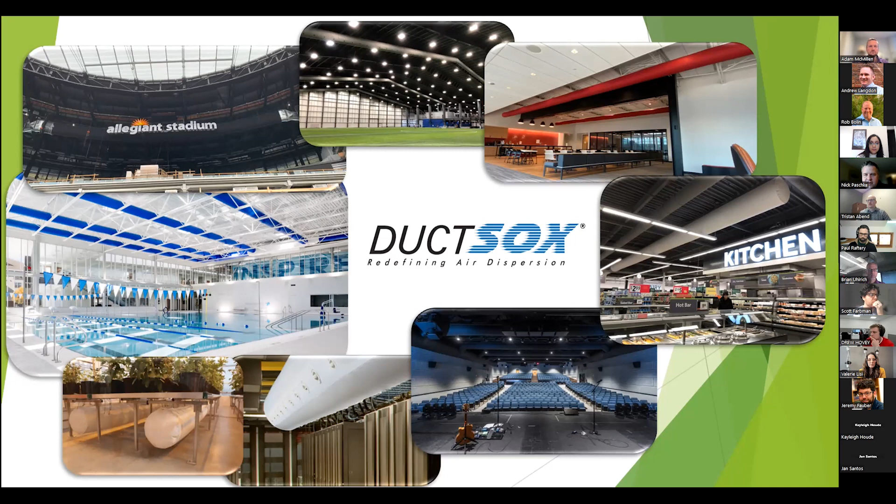Our applications include a significant range of different types of projects, and for various reasons, there are significant benefits. Our history with doing things differently is not only with product applications, but also with our whole initiatives around energy efficiency and green buildings.

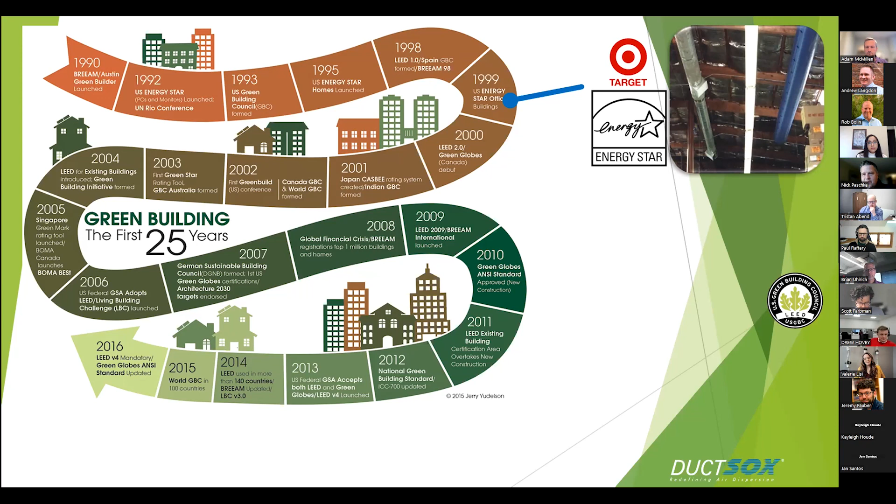Early on, we started with a customer out of Minneapolis that many of us are familiar with, and they had an Energy Star initiative to reduce energy in the stock rooms in their facilities. We did a whole Energy Star series with them and found that more outlets are actually much more efficient than fewer larger diffusers. It's fairly intuitive when you look at a photo, and marketing hates that I use it, but it's real. Ultimately, this is a simple example of where we look at energy efficiency.

We've also been involved with the first Greenbuild project with the David L. Lawrence Center, that project out there. So we got involved in Greenbuild very early.

And then, as our product being more visual, it's also architectural, so we started to lean more towards the LEED program and found interesting challenges in the marketplace where there was really no place for mechanical systems. So we started to add recycled content, and then years later found out no one was really interested in recycled content in the mechanical system because they didn't have a means to grade it.

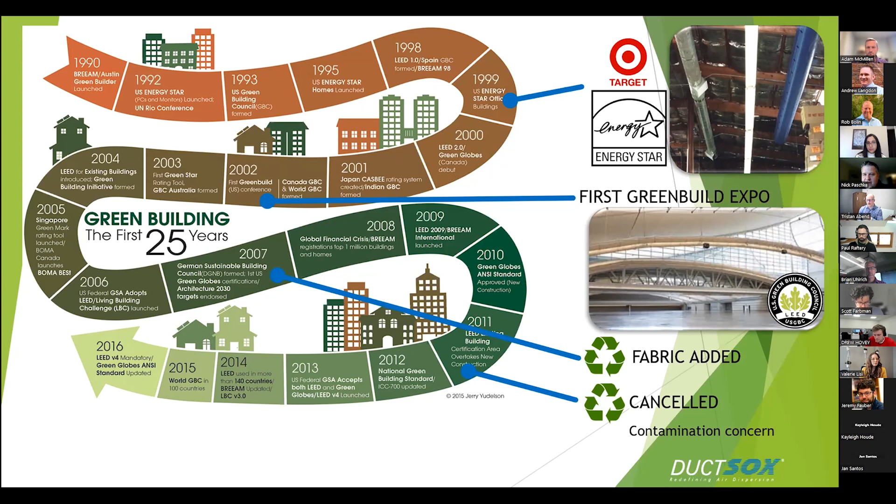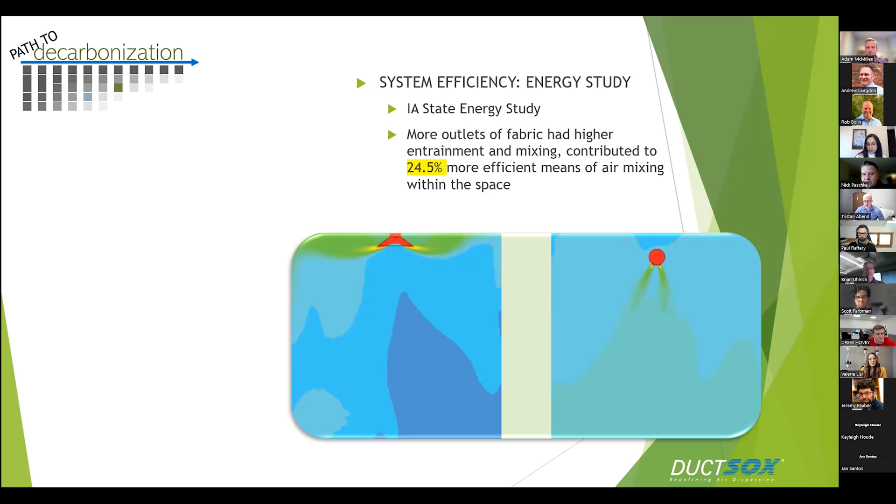So as we got into conversations there, we started doing more energy studies, looking again to determine the improvement of air delivery. We did energy studies and significant studies in different marketplaces - labs, data centers, underfloor, and kitchens. So we've continually looked at how the product can perform and really where we see significant performance gains.

We've also looked at the healthy building perspective, or healthy product perspective, I'm sorry, looking at what exactly goes into the material in the product and all the components. So we've been looking at the components in our product in a slightly different way.

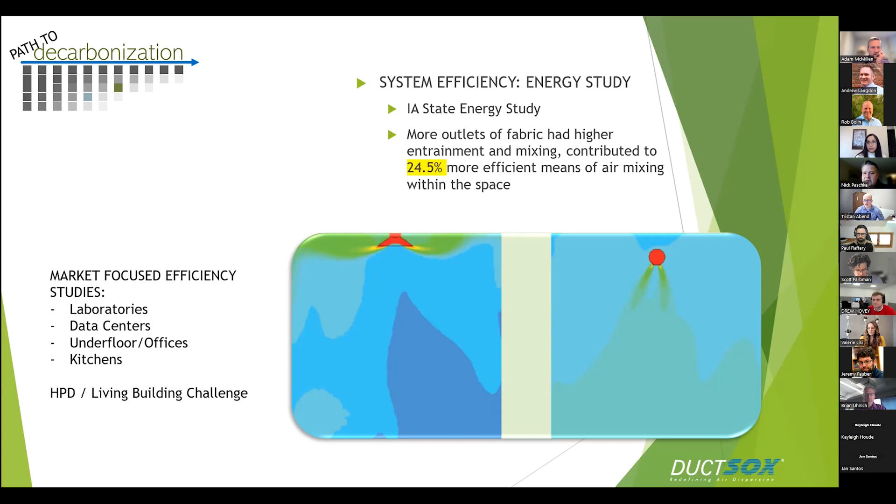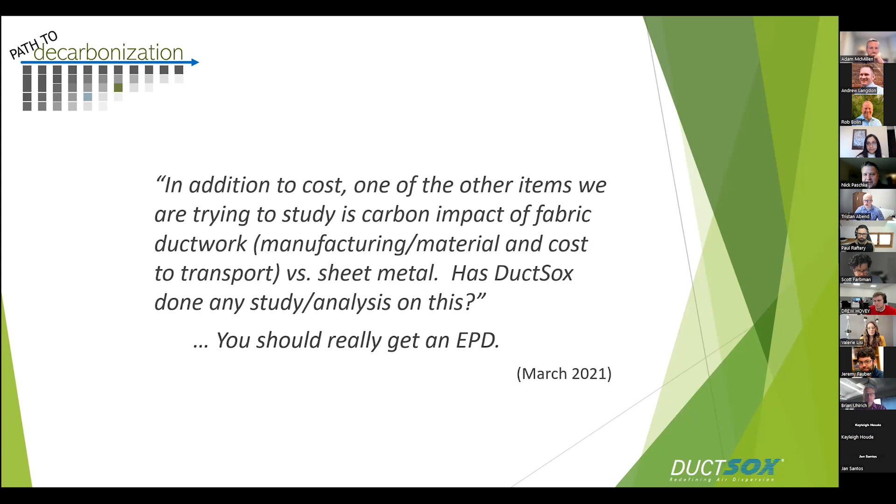Our story really starts with an email, oddly, from March of '21, from a customer that said, hey this is great, we were very familiar with your costing, but have you done a carbon impact study? They said we should really get an EPD. Of course, with that initiative, unfamiliar with EPD, I Googled it, and went internally to our engineering team and started doing more analysis. Again, this is 2 years ago, trying to identify what it was, what our next steps were, who in the mechanical space has them, does anyone have them, what do they really tell a customer, what does a customer do with it, how much does it cost?

Those types of questions, as I'm sure any manufacturer would go through, putting together a carbon score for a product. And for us, it was pretty intriguing in that ultimately, we've always been trying to look at how do we show the value of our products differently than the industry standard. And for us, it really then became, where do we start and who can help us? And who were our real advocates to go through.

And oddly enough, one of our partners that we work with, we immediately went back to our supply chain. And one of the companies that we absolutely respect the most is Milliken. And they live in that architectural fabrics, textiles, carpet world of making sure that they can have as much recycled content and/or the story correct and the story within their factories all correct on their low carbon footprint.

And so we spent a lot of time with them, and they of course introduced us to WAP Sustainability Consulting, and looking at them as a partner of, dare I say, Sherpa-ing us through the process of what to do, where, and how to do that. And then, of course, WAP brought us to the post, which is the certification process, which was with UL.

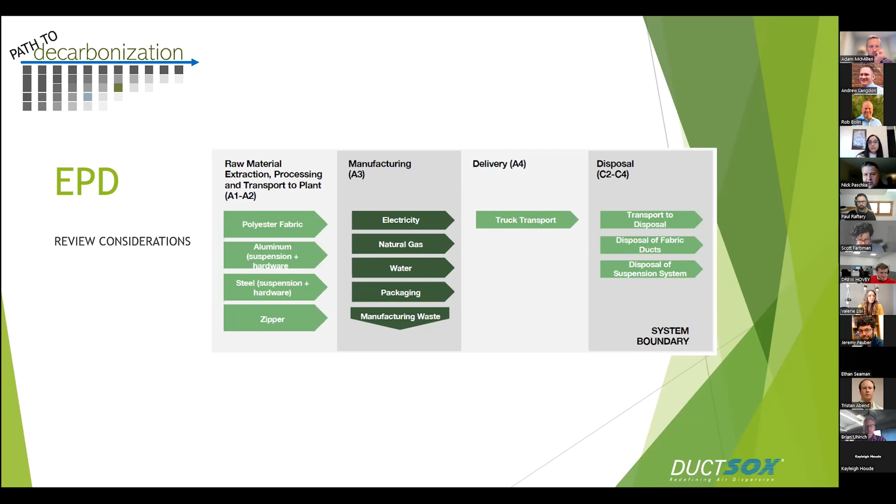In looking at the components themselves, some of the more taxing elements for us were really because we have multiple factories, we have many different vendors that we work with, I'm sure just like any manufacturer would. And ours was to come up with the BOMs for each of the products that we had on hand, but we didn't have it in the same evaluation as we do now as a result of going through this process. And then looking at energy consumption or water usage and all the things that we were aware of, but not in the same scope at our manufacturing facilities.

And then also looking at even the packaging materials. Just yesterday I had some emails about what plastic we're using in packaging our product. It's interesting to see some of those things start to come to the surface that never would really be a consideration in the past.

But as it works out, it's something that our team is really good at going through that process. Because we've done several of them now, it's become very routine of, okay, let's just run through the process, make sure we've got everything. They've got a process in place for how to document it. It really worked out well.

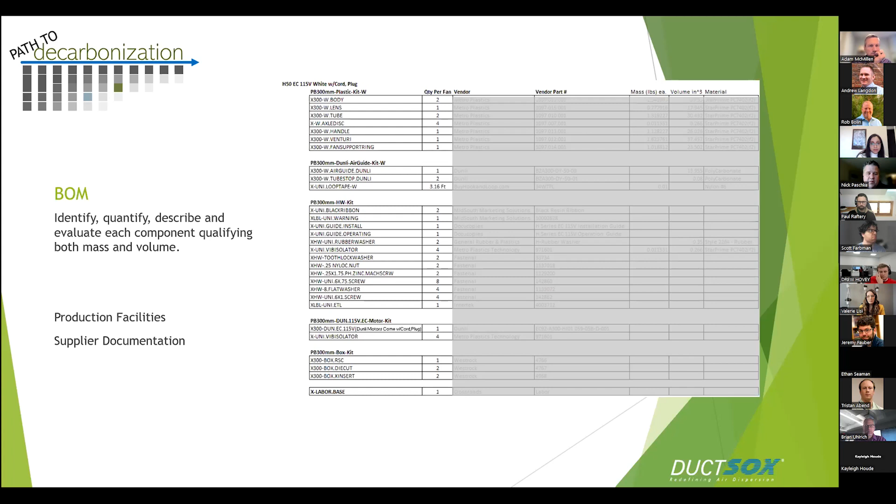And then of course, for the EPD documentation, it's going through capturing all the rest of the, I'll say somewhat marketing materials, but then also other information that is expected to be shared, some elements that we haven't before. And it's really nice to see some of those actually come to the surface. Little things like even the VOCs, where our product does have a little bit of benefit in that we're not painting or doing anything on site, so there's much lower VOC emissions.

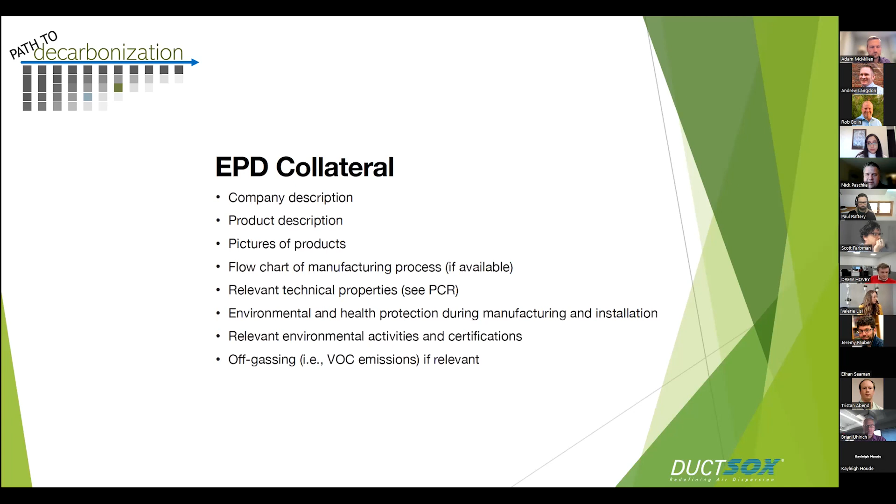Timeline that we saw on the project, the initial scope, I think, was in the 7-month time period. I think it probably got closer to 11 months. But in those 11 months, they completed 3 EPDs. The reason we broke it up into 3 is we have different ways that we support and suspend our product or put structure inside the product so it doesn't deflate. So we came up with the 3 different measurements, and it's basically one that has very simple structure to, obviously on the right, the FTS with a bit more complex structure.

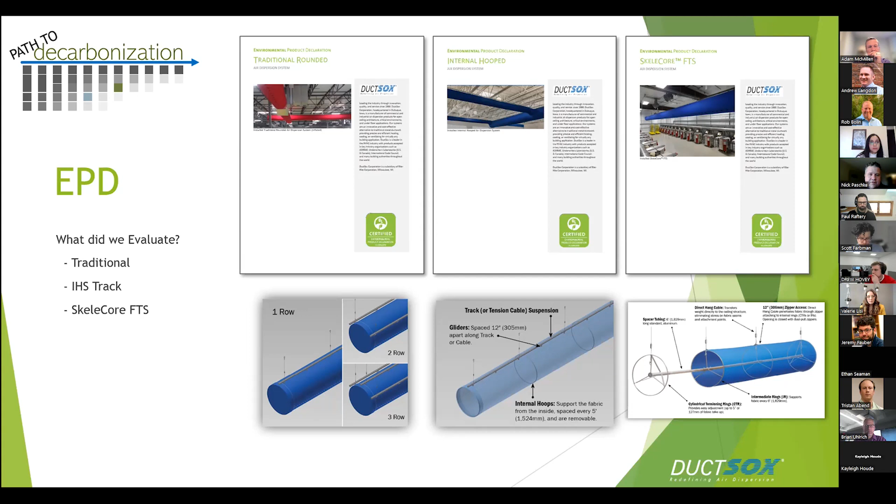But the difference in products, ultimately, the one on the right carries a 20-year warranty. So it's a much different customer valued product, if you will, with the FTS. And internally, we're actually taking some of that information and starting to look at developing some quick calculations, because the GWP is basically calculated based on a per meter surface area of the product. So we can very quickly start to evaluate tonnage of CO2 equivalent offsets or GWPs based on product line. So we can look at our FTS or IHS or traditional, and based on a diameter and a length and specific criteria, come up with some information that's very useful for a customer to consider. And it's a relatively light footprint.

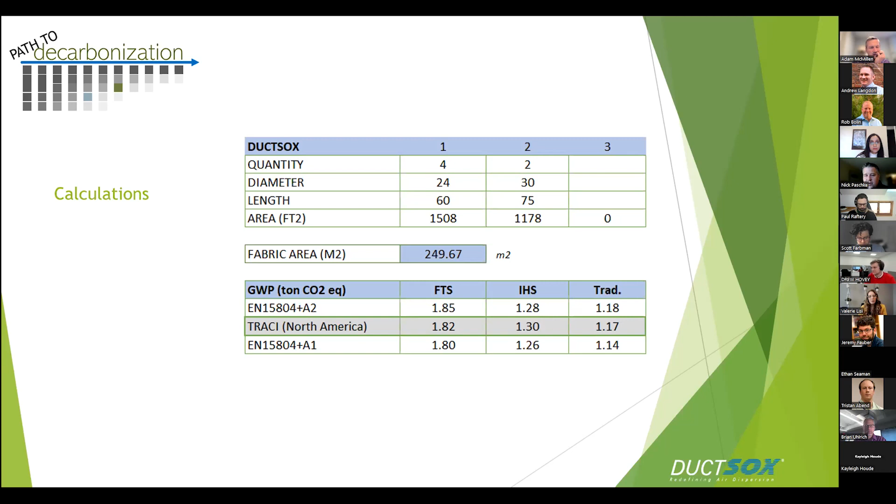As far as what's the future, what are we doing next? Now that we've gone through this process, we're actually looking at other products. Somewhere near the beginning of our process in developing our EPDs for DuctSox, we actually acquired another company with the destratification fans, and we actually have those EPDs. I think they're about 95% completed, if I recall. They're probably coming out end of March, early April, so it'll be our fourth.

Also, being part of a larger organization, suddenly it's become an initiative within our parent company. So now we have a work group internally that can reach out to leads in our group that have done the work so far, and suddenly it's becoming kind of an internal culture of which products are we going to look at, where does it make the most sense, and details with that.

The other thing that it's helped us with is the product development phase, where historically we would look at things more from a cost or a long-term durability, not always with the same carbon footprint mentality. And now that we have the BOMs for all of our products, we can start to isolate specific components and look at the carbon impact of changes in each one of those component categories. One example, we're significantly looking at recycled content again, and our suppliers are on board with looking at it. It would significantly reduce the carbon in just that one element, let alone some other things that we can look at.

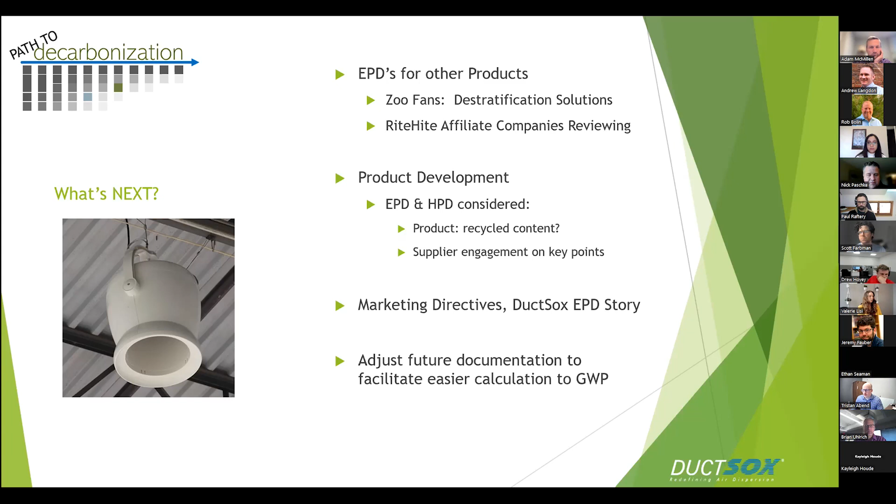But for us, that was part of the challenge, just making sure the information is available, but finding a better way to carry that forward, which I'll talk about in a moment. And then for us, we also want to look at adjusting future documentation. So when we send out proposals for DuctSox, we actually include a freight estimator and an installation estimator for our contractors, so they know how much time it takes to install right on the proposals. I could see in the future that we'll start putting GWP or the carbon mass consideration for the products that are in the proposals. That's something that could be carried through relatively easily, given the nature of our product.

Now, market feedback. I think one of the interesting market feedbacks that I've gotten since engagement with MEP 2040 has been the sales network themselves. I think they really didn't know what to do with EPDs, other than, again, being here in California, there's a little bit more of an accelerated path for decarbonization with some of the state mandates and initiatives. But for them, they really like the idea that it helps tell a slightly different story specifically about our product, and it helps them take something to their engineers. So that is really something I'm seeing that's a bit different.

And then for us, we're also identifying and approaching strategic customers that are valuing the EPDs. As an example, we had one customer that was targeting a 20% reduction in their overall mechanical system in their projects, and they did their own independent evaluation of fabric versus their traditional solution with rigid metal duct and diffusers. And they found that the carbon offset to switch to fabric was about a 70% reduction in carbon on their own analysis. So moving forward, we want to engage with more clients and find out from their perspective and their own studies what their story would be using our product.

The pleasant surprise was the internal engagement with our R&D. Initially we were asking them to do a lot of analysis, asking production to do all the homework to equate the products. It's pretty interesting to see. And I'll share the joke. I talked with our director of production, and I asked him frankly, how many hours do you think you had in putting it together? And his response was pretty blunt. He said, what does it matter if we're saving the world? I said, fair, never mind. And I'm really surprised by how our production team has jumped onto the process and really grabbed it, if you will.

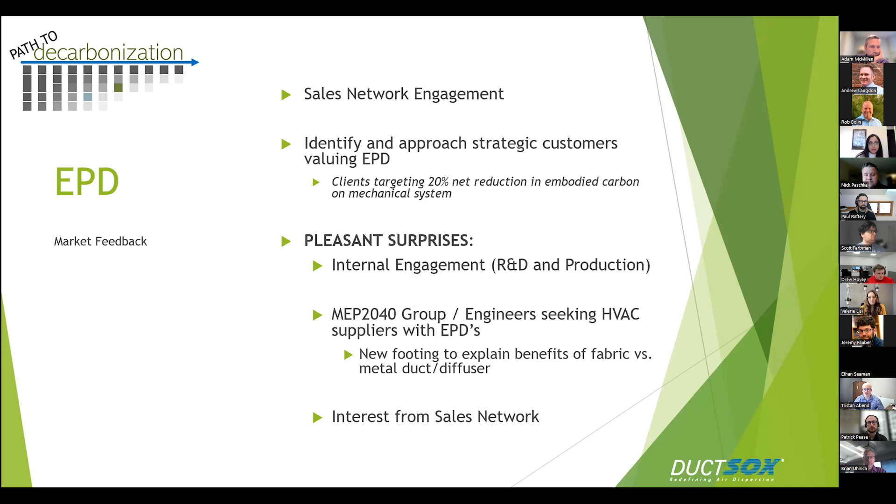Any questions? Actually, did you say you want to pause until after, Adam? Yeah, Nick, we'll pause and do that after the roundtable. But thanks. I love that. What's it matter if it's going to save the planet? It's a new mantra. I love it. I'm saving that. I can justify a lot of lost time for that. That's good. Yeah, it was pretty blunt, but we love him for that. It's great. Awesome. Thanks, Nick. You bet. Thank you. All right.

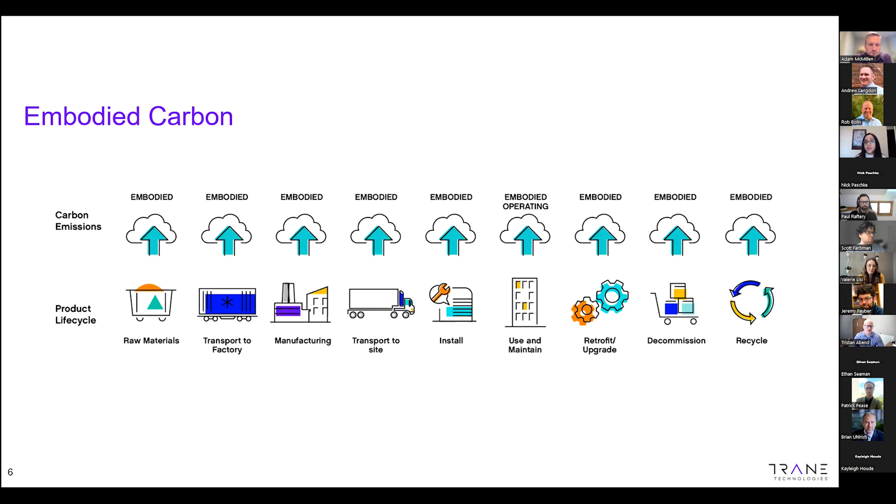So I'm going to talk about embodied carbon. As probably everybody here is familiar with, it's really all of that product's life cycle carbon footprint, with the exclusion of the use phase energy, or what is called the operational carbon. So why is this important? As buildings tend to high performance and net zero, emissions shift from operating carbon to embodied carbon in the total carbon footprint. And we see a similar shift on the transport side from gas and diesel to electrified transport. And that becomes important for our Thermo King brand, which is all about cold chain transport.

So the embodied carbon, due to the use of steel, aluminum, refrigerants, represents the harder to abate industry sectors. So prioritizing early is important, and we certainly acknowledge that. And we think there's a close tie between circularity and embodied carbon. It's an enabler in reducing that total embodied carbon footprint, because it takes a lot of energy and fuel to mine, extract, and process raw materials like aluminum and steel and plastics that we use in large quantities in our product. So if we can reuse and repurpose those materials instead of mining for them, that can greatly lower that embodied carbon. And up to 45% of emission savings globally can be achieved through circularity by some estimates.

And with many of our customers making embodied carbon reduction a priority through participation in groups like MEP 2040 and others, it's certainly top of mind for us as an organization to meet our customers' needs and expectations.

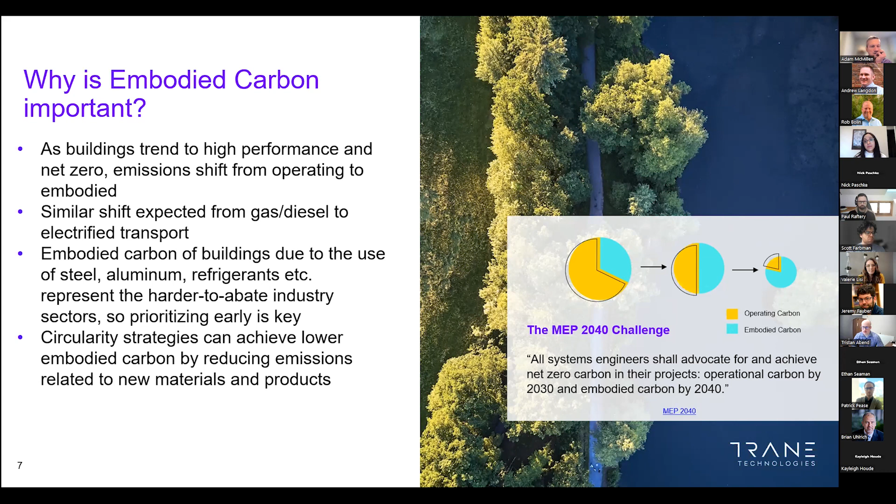So this talks about all of the demand drivers we are seeing. We lead the industry in our sustainability and climate innovation, and many of our customers and external stakeholders are looking to us for leadership in these areas. Historically, we've seen a huge focus on the emissions reduction from the use of our products, our customers' scope 1 and 2 emissions. But here in the last few years, we see increasing expectations that go beyond the use of our products to that whole product life cycle.

So from the embodied carbon side, there's a need for life cycle assessments, measuring whole life carbon and reducing upstream supply chain emissions. And from a circularity perspective, there's an increasing expectation around the use of recycled materials, reuse and take back programs. So all of these are going beyond that use phase.

And it's not just customers. We see investors that look to rating agencies like the Dow Jones Sustainability Index, SASB. They're also all focused on metrics that go beyond the use phase to that entire product life cycle. And finally, regulatory trends that we are seeing around the globe, such as the upcoming EU regulations on eco-design and circular economy, are also looking at that whole product life cycle.

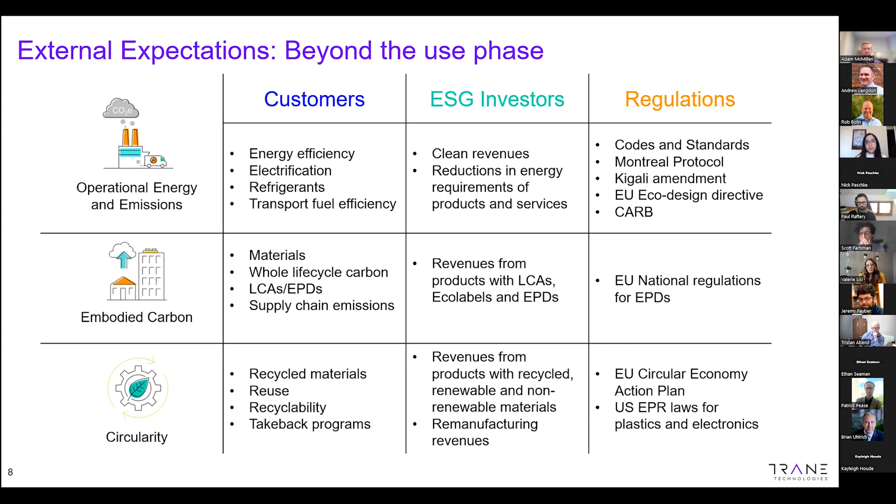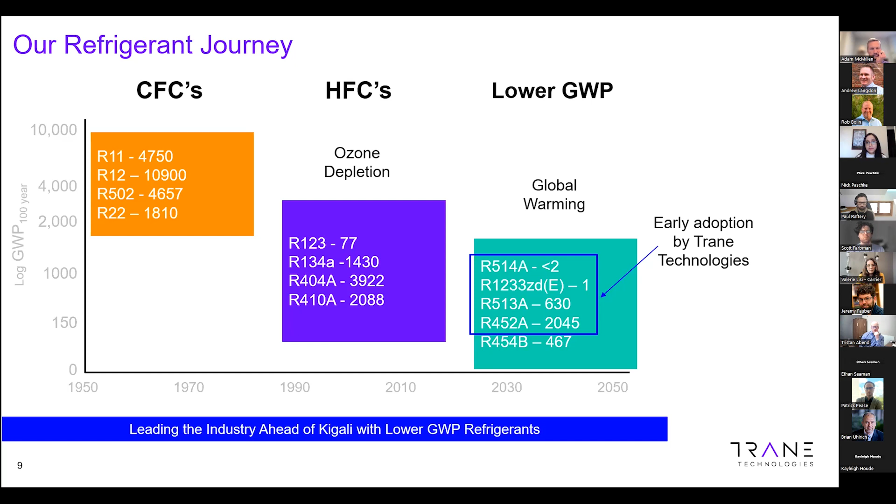So on circularity, we have a 2030 goal on circularity because there's a close tie again between circularity and embodied carbon. As a part of that, we are looking at materials, design, and services to close the loop on products, components, and materials. So we are working with several of our suppliers to increase the use of recycled materials like steel, aluminum, cast iron, copper, and we are working with them to decarbonize primary materials as well.

On the design side, we're continuously improving how we can design for disassembly, maintenance, reuse, remanufacturing, so we can keep these products, materials, and assets in use longer. And we're also implementing modular design and component standardization techniques that drive better circularity outcomes.

And finally, we have a whole slew of services that we are offering to extend product life, such as repair and maintenance, intelligent services, digital services. We have an upgrade program that assesses old equipment and upgrades key components to bring them to current efficiency standards.

We have remanufacturing operations that take back those old components, like compressors and motors, and give them a new life by disassembling them, repairing or replacing necessary parts, and reassembling the product to original specifications.

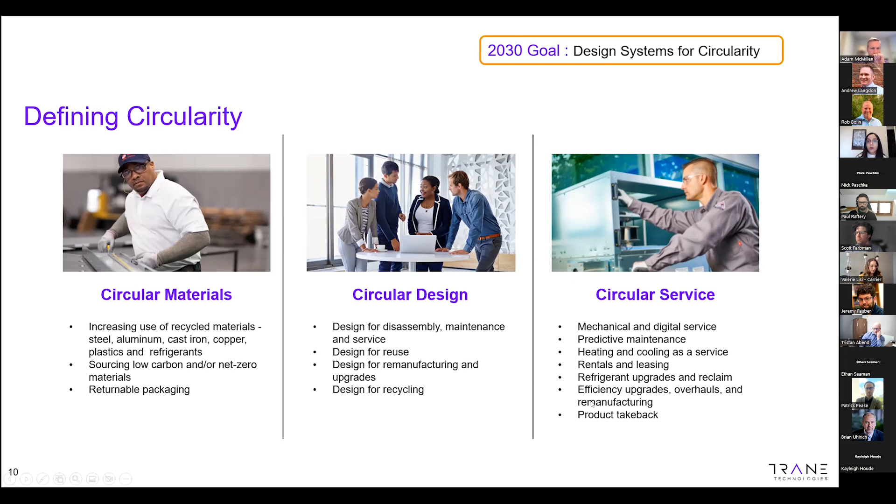So with that, I go to talk about our EPD. We were the first in the HVAC industry to create an EPD for centrifugal chillers back in 2011. It has an associated PCR, and we recently updated this EPD for 3 models: the Simplex brand of CenTraVac chillers, the Duplex, and the Agility centrifugal chillers. These are manufactured here in the US and also in China.

This EPD is available in the UL SPOT database when you search for Trane Technologies and chillers, and it literally just was released last month. So again, it's the new one; we've had one since 2011. Nick covered a lot about what EPDs mean, the background and the data collection, so I won't go into all that, but essentially it maps out the environmental impacts across that whole product life cycle of the chiller, including the carbon footprint, which is super important.

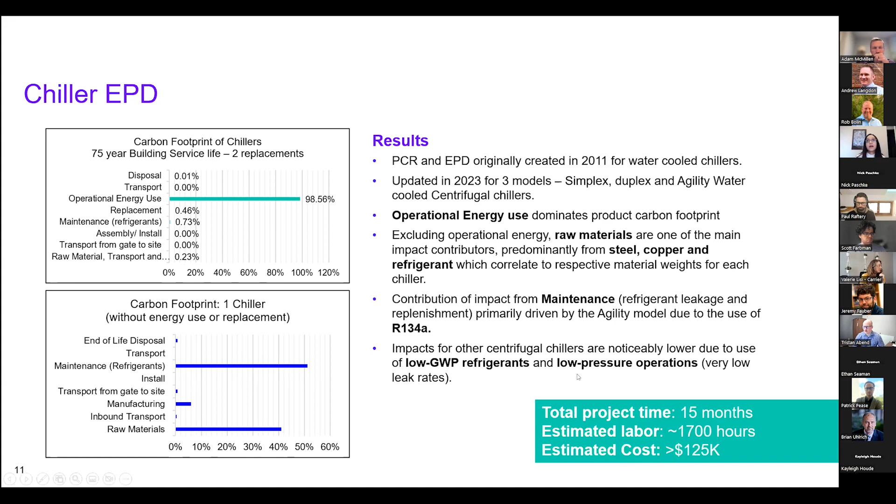So that's on our EPD, and a little more in terms of benefits: they definitely provide a scientific and standardized approach to mapping the environmental impacts of our products. And as engineers, we all love scientific approaches. They provide insights into hotspots that you saw on the graph before, and they allow comparisons between products amongst competitors, as long as the underlying assumptions are similar.

But we feel that they have several challenges too. For the complex BOMs of HVAC, you spend a lot of time and resources gathering data that may ultimately not be all that impactful, like the transportation piece I mentioned. We know these equipment are heavy energy-using equipment, so a lot of the impact we saw was obviously on the operational energy use side.

And even with all the data we gathered, we still have to rely on some global averages in the LCA modeling software for raw materials such as steel or copper, because those go to tier 2, tier 3 suppliers. And the scope of the LCA was really just the tier 1 suppliers, so this may not really be representative of the total product supply chain.

And then another call-out is that the operational energy use calculations - that 98.5% - that's a global average across 55 cities around the globe as defined by the PCR. So it's not all that accurate to use it as a proxy for your building project, which can vary widely based on the geography, the application, the load, and many other factors for your project.

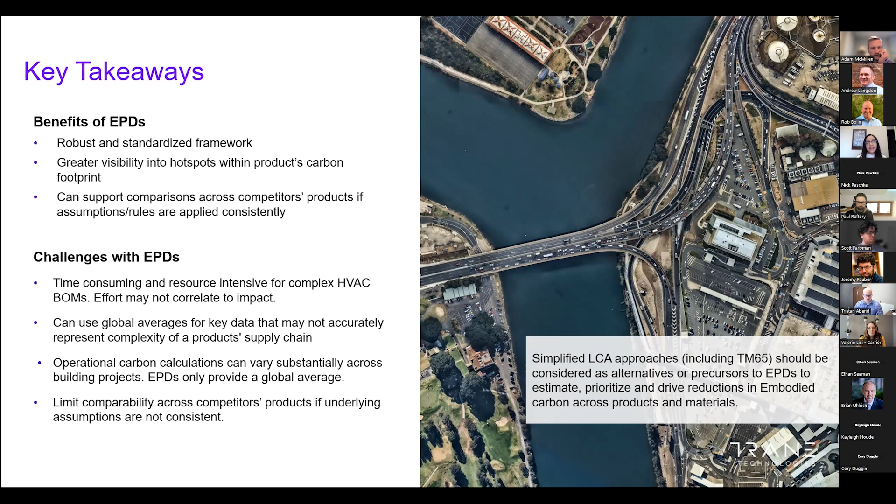We already know, from the EPDs and LCAs we have done - and we've done this for some of our transport products too - that the embodied carbon comes from the materials as well as from the higher GWP refrigerants. So as I've already shared in my presentation so far, we are working on prioritizing the decarbonization of those materials and components. And that's a good segue to my next slide.

Which is to talk about our net zero steel commitment. So we have committed to procuring net zero steel for 50% of our steel purchases by 2030, and 100% by 2050. We are already at 20% of our purchases today, in collaboration with two of our steel suppliers, Nucor and US Steel.

So we are definitely, with the updates to the lower GWP refrigerants and all our work on reducing and decarbonizing our primary materials, we believe we are well on this journey, and this steel announcement is proof of that.

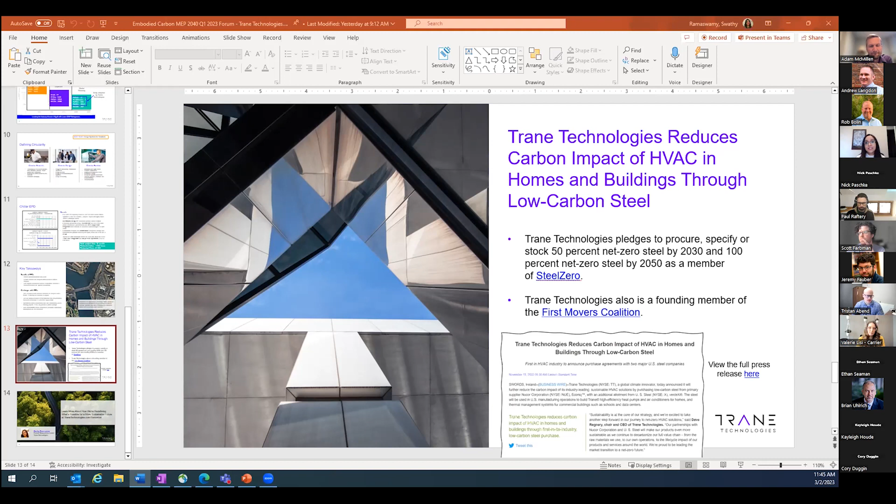So with that, I wrap up my presentation. I'm very thankful to MEP 2040 for giving us this opportunity to talk about our journey, our sustainability and embodied carbon journey. I think we'll open it up for questions once the third presenter is done.

Carrier is very proud to announce that we've already published 31 LCAs for our products manufactured in Europe. They're in the form of the PEP Eco Passport. PEP stands for Product Environmental Profile. It is very similar to EPDs, as have already been discussed. They also follow ISO 14025 and require verification. It's essentially the European version of that. You can go to the PEP Eco Passport website and view them.

We have 18 of ours under Carrier, and then 13 are under CIAT, which is part of Carrier. In North America, we are working on 19MV, which is a water-cooled centrifugal chiller with magnetic bearings. As you saw from Trane and Ductsox, it takes a very long time to do these assessments, and we are wrapping ours up shortly. Very excited to move on and do more.

So next, I'm going to pass it over to Tristan. He's going to talk to you about the actions Carrier's taking to get ahead in the design process for sustainability.

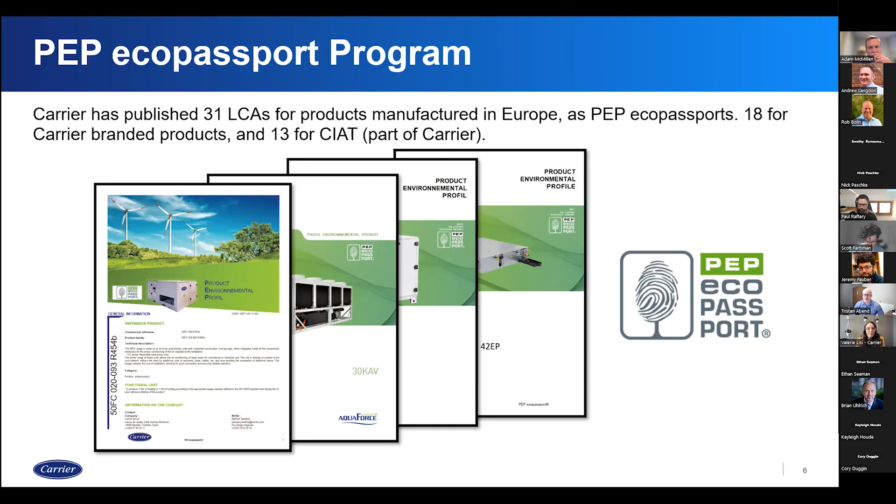Thanks, Val. So hello, everyone, it's good to be with you here today. Just a quick, what is my background? I am a mechanical engineer and economist here at Carrier. For the past 3 years now, I've been heading up our value engineering team, specifically focused on cost modeling, both legacy products and new products.

Part of our effort in the past year has been working around design for sustainability. Part of that is really what we can do on our side in our cost modeling to broaden it instead of just focused on cost. Our main driver that we use for our costing is Apriori. Specifically, today we're really focusing in on the carbon footprint for new product development, using this platform as a way to help our design engineers make better decisions up front and make them more automated instead of having to sit down and really educate not only our workforce, but also our entire organization. This is a way that brings us all together in a much more cohesive manner, and that way, when we make our carbon footprints, we're making good decisions faster.

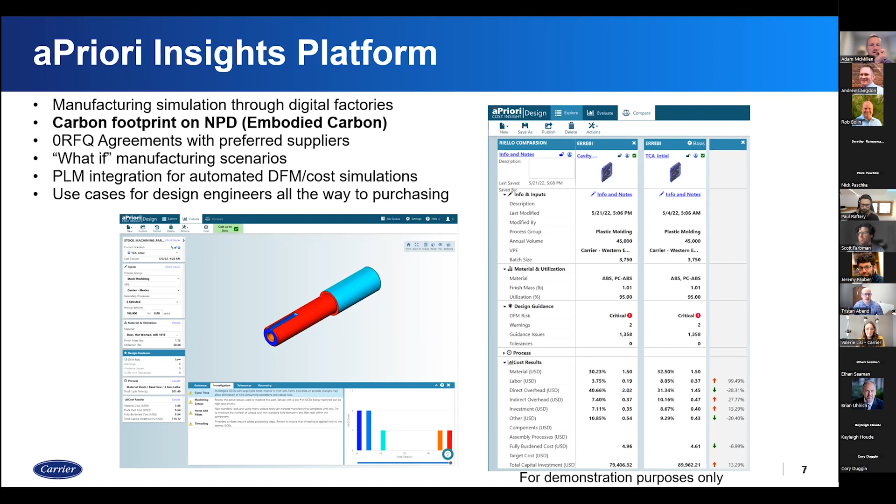So what is Apriori and how are we using it? From a high level, Apriori is a software provider that we have been partnered with for over 3 years now, and that has been a very rewarding partnership for us. We have helped Apriori with many different features on the software side to help build in more features for not only us, but everyone that uses this software to help everyone. For what we are looking at today, what we see is a sustainable transformation through this software and then through our team and centralized engineering ops teams.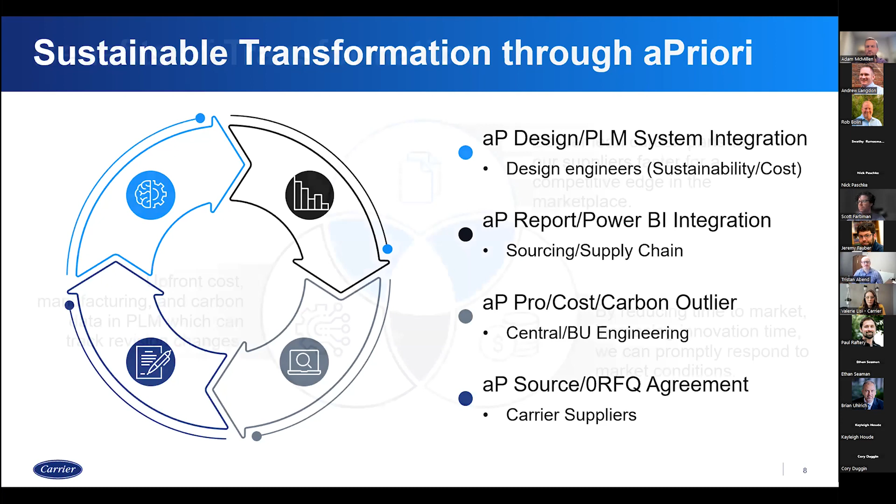I think the benefits are clear. I don't think it would come as much of a shock to anybody to see some of these things on the screen. As I said, upfront cost, manufacturing, carbon data that lives inside of our PLM and ERP systems. This is a radical change from what we've seen in the past, where you have to virtually go through different systems and piece together things along the way.

And it creates an environment in which design engineers can't make good decisions because they don't know what they don't know. What we want to do is bring these systems together. And that's what we and Carrier together have been striving for for 3 years now, and we are seeing very good success. We want to deliver lean carbon parts to our suppliers faster. This will allow us to have a greater competitive edge in the marketplace and be more agile.

We want to reduce our time to market and get it right the first time. This will create more time for innovation. Something that we strive for every day at Carrier is to make our products better, whether it be quality, cost, or just pure function. We strive for that every single day, and we want to respond to market conditions. And that's where this software can really help our engineers make those decisions.

This software is an industry standard. It is a software that has been out for a long time, but as part of our partnership, we've been in the early adopter program for the rough carbon footprinting that we are able to do inside this software. And it will finally be released later this year. And we're very, very happy to be working with aPriori on something as ambitious as this.

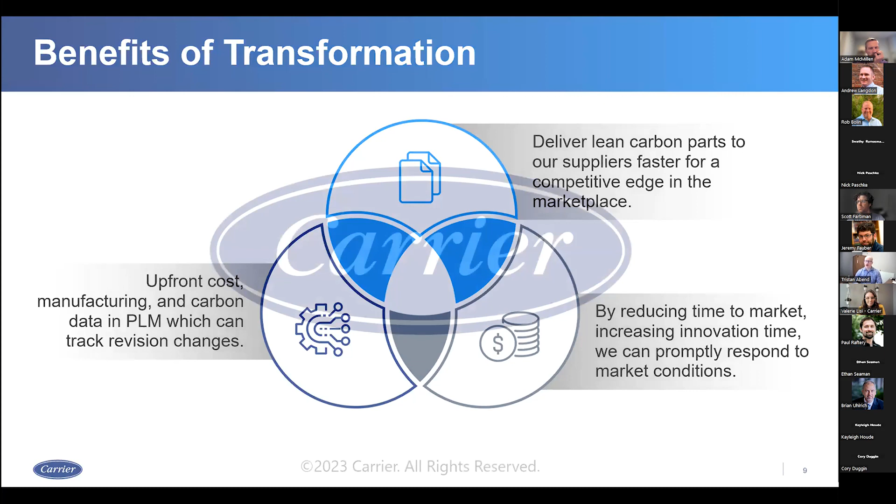So at this point, what we'd like to do is take a few minutes with our three panelists to have an open forum from what you've heard. The panel group did meet a few weeks back to talk about making sure to convey to the audience what the journey was like, what are some of the positives, what are some of the negatives, and all the presentations had that. But were there anything in hearing one another present that came up to you, or good points of discussion that we might want to convey to the group today?

Is someone fielding the questions from the chat, or should we ask them now in person? I see one here that's directed towards Carrier. So the CO2 refrigeration systems, we only do commercial refrigeration in Europe. However, we do have CO2 in our transport refrigeration systems that are offered here in the US. You want to look at our NaturaLINE units.

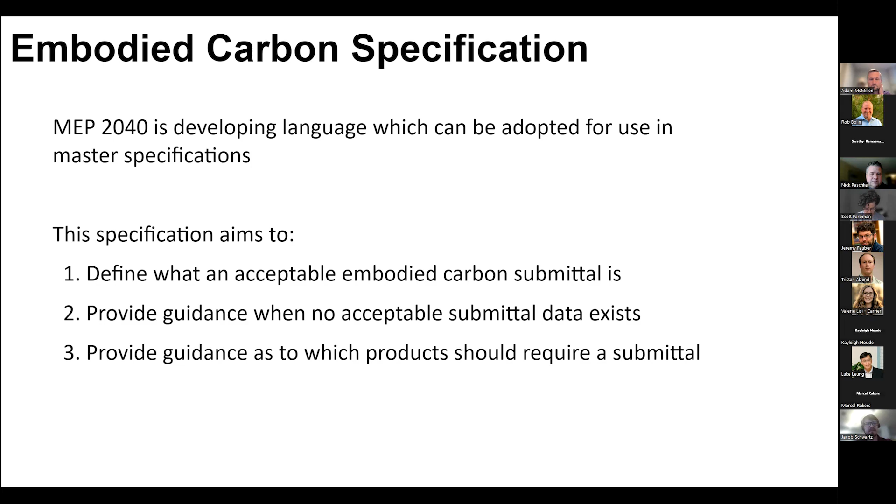So this is kind of the core of this specification. Basically, when we're asking for a submittal, some are going to be better than others. So we've created this language, which is a hierarchy, basically saying what is the most preferred submittal and least preferred but still acceptable submittal. And so in this list right now, we basically have EPDs and TM65 manufacturer forms.

I'll speak a little bit about TM65 after this slide, but essentially they're kind of the least desirable but still acceptable forms of a submittal that could be meaningful and valuable. And then after that, there are the different tiers of EPDs which could be used. So a product specific, facility specific EPD, something that is very explicitly related to the product at hand. And then as we go down the list, we get lower and lower desirable submittals.

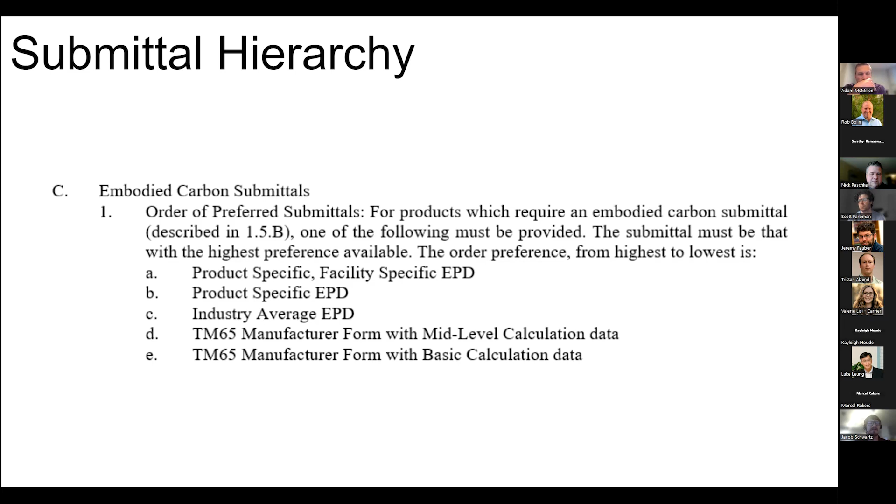Next slide. And so I just wanted to speak a little bit about TM65 because it is something that we're wanting to include in this spec, and which I think will have value for the industry moving forward. What it is, very briefly, is a calculation methodology which provides a conservative intermediate estimate of the embodied carbon of a product.

This is by no means meant to be the end-all be-all form. That's what an EPD is, but TM65 offers a way to fill the gap between there being nothing and an EPD, which can take a long time to achieve or to get. And another huge benefit is that it can help guide what EPDs we do want to go for.

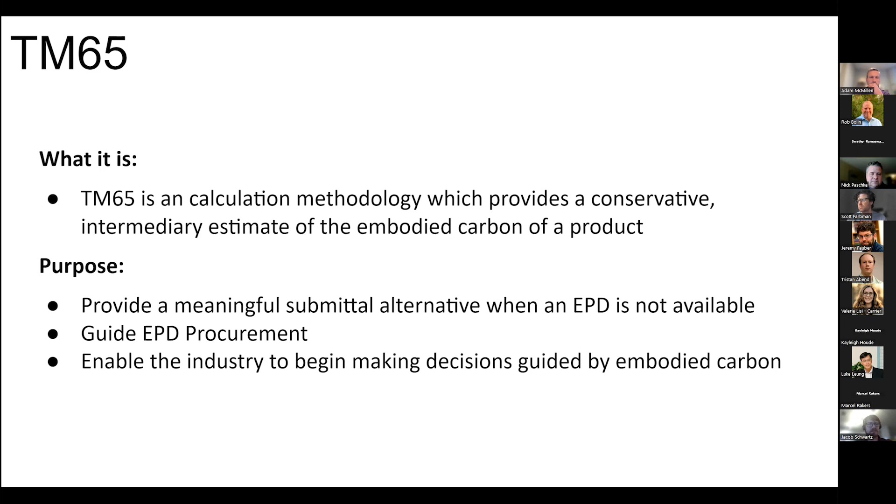Because it's worth noting that with TM65, the bare minimum information required that is maybe a bit novel and you can't already find from schedules is a material breakdown. So essentially, if you can provide that material breakdown, the rest of the information is available, and we can use assumptions that allow us to give an estimate of the embodied carbon that can lead us to choose which EPDs we want to focus on. So that's TM65 in a nutshell. Happy to chat with anyone more about this in the future.

Okay, and so in terms of speaking with you all, I think it could be very valuable that, as part of the specification, we want to decide which products would actually require a submittal. And so there are some criteria that we can use. Basically, these are suggestions. We could look at the weight of the product. We could look at the overall cost of the product. We could maybe try to choose something that is a major piece of equipment.

Ideally, we would look at existing embodied carbon data to decide what is going to require submittals so that we can capture that impact. But obviously, we don't have that data currently. And so this is a first pass attempt at looking at this sort of thing. But we would definitely appreciate feedback from manufacturers moving forward in order to make this more nuanced for our first iteration of this specification.

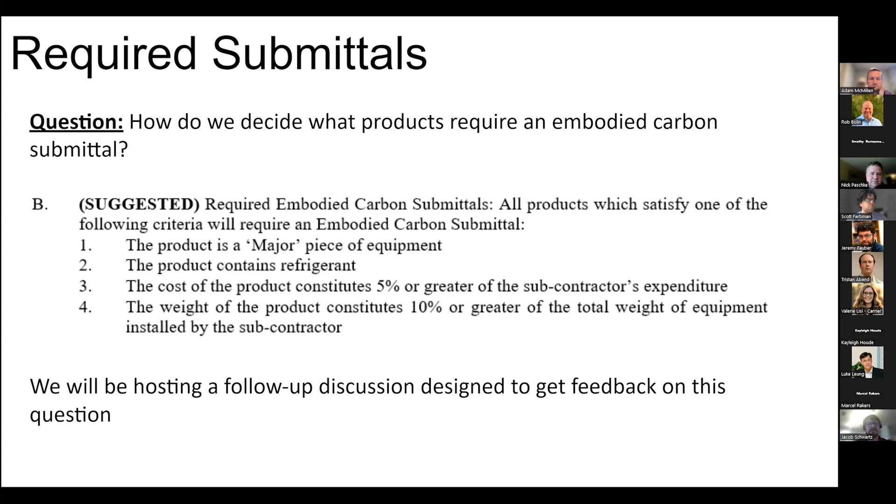Next slide, please. And so this is sort of just a speculative hypothetical. In the future, when we have this data, it would be really nice if we could standardize some way to get a single number that could be taken from these submittals and associated with the schedule of the product. And I think this would have two very valuable qualities.

But yeah, and so I think that's kind of all I had. Love to work with any manufacturers interested in having input on this in terms of what's realistic moving forward. But yeah, turn it back to Adam.

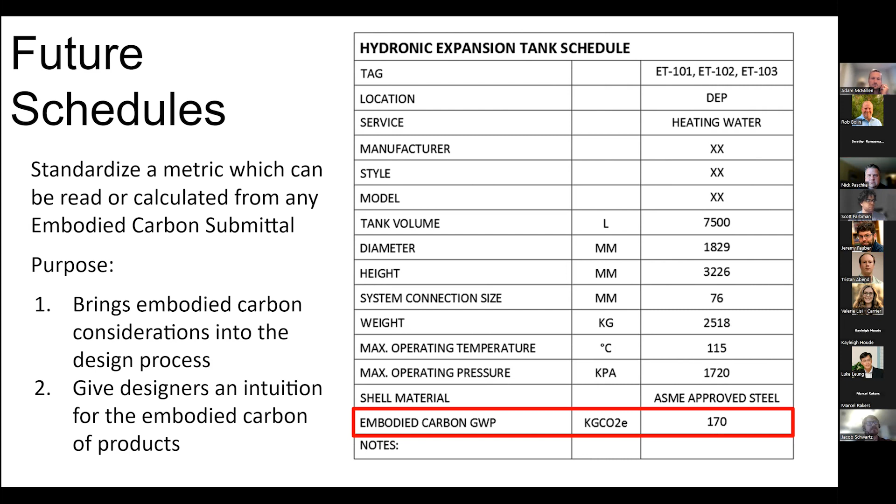Thanks. Yeah, thanks, Jacob. Yeah, and I think the invitation here is that folks that have interest, please reach out. Maybe you can put your name in the chat. We can be added to the working group and figure out how we can coalesce around the specification and where it would live. And ultimately, manufacturer reps will at some point see this and say, what the heck is this? So we want to make sure that we're kind of ahead of that side of it as well.

So then the next piece, just briefly before we go to working group updates, Kate Hickcox with PNNL had been involved with the working group and is involved with an incubator, which she can describe a little bit, in the past, to help move forward, break down some of the barriers to getting this data going forward. So I just wanted to invite Kate on just to say a few words about the work they've done in the past and really extend an invitation to potentially put together something like this for HVAC and other MEP equipment in the future. So Kate, if you want to say a few words.

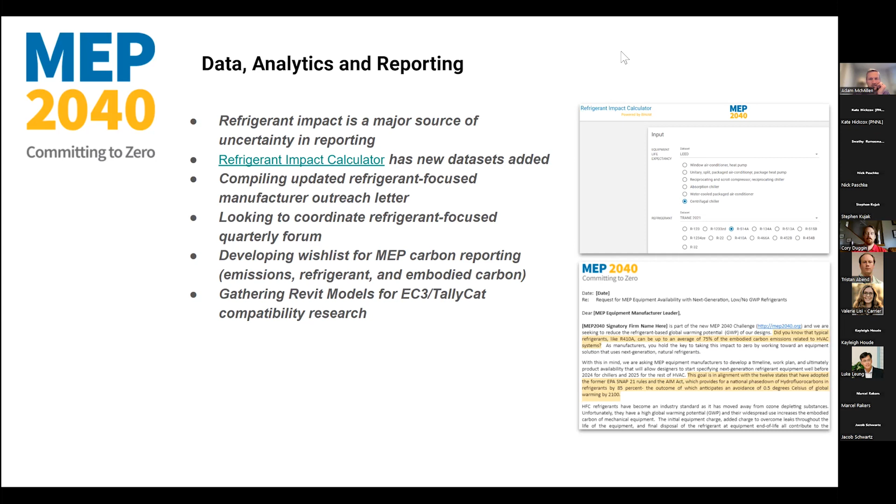Great, thanks, Cory. No problem. Next to communication resources. To Andrew or Stephen. Yeah, well, I can cover it here then. As I mentioned at the beginning, we have the new LinkedIn channel added. So if you haven't done that already, please log on and follow the page and get the updates.

Our website is a good central location. These forums are recorded there for other people that could not attend to be able to see what was discussed. Another big push is that we have company plans. So for all that were signatories, we're now moving to the phase where we're looking for each signatory to submit a plan. There'll be more on that in future forums, but that's also through the website as well. And as you have others in the organization that want to support the effort, please invite them in to be a part of the group.

Manufacturing EPDs, I think we've been through the updates. A big part of it was putting on this forum here today. We do have refrigerant EPD letters to manufacturers available at the website. We've heard from our presenters today that demand from industry really helps drive action from them. So for submitting these letters, or if you're trying to ask for information on a product, there are some templates available from the website that you can use. And we'll continue to have discussions with manufacturers and advancing the spec language and other things that we're working on there.